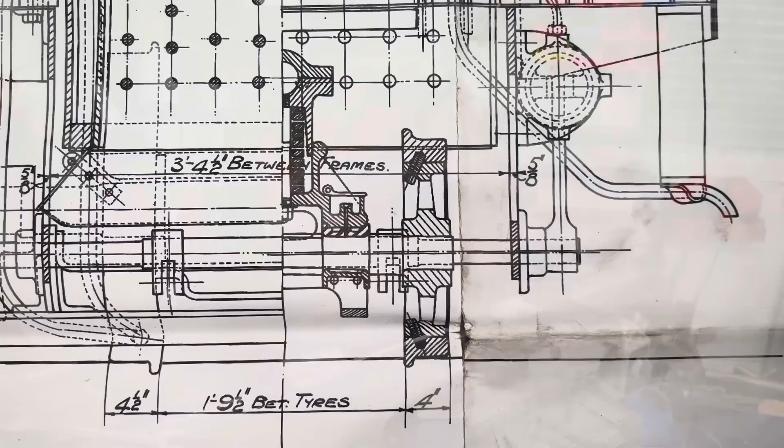So, looking at the end view of the loco, we are obviously back to the bogie again. Looking here, this is the main casting, which, if you've seen the other videos, you'll remember, quite a complicated, large, chunky casting. Down at the bottom, there's two little dowel pins that go through those holes, that go through holes in the casting, straight into the bottom keep for the axle box shell. You can see the two holes there just above the new foot that we welded on in a previous episode.

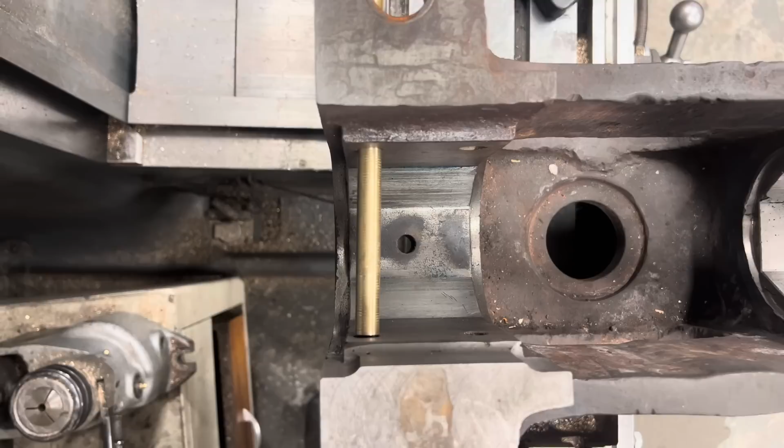If you look at this brass bar here, all you're looking at there is a brass bar pushed through the original hole, and you can see that it's not square, it tails off wildly to the left there. So we had to make a decision whether we lived with that or whether we tried to square them up by boring the holes out a little larger and putting an oversized pin in, which ultimately I decided we couldn't live with the wonky angle, so that's exactly what we did.

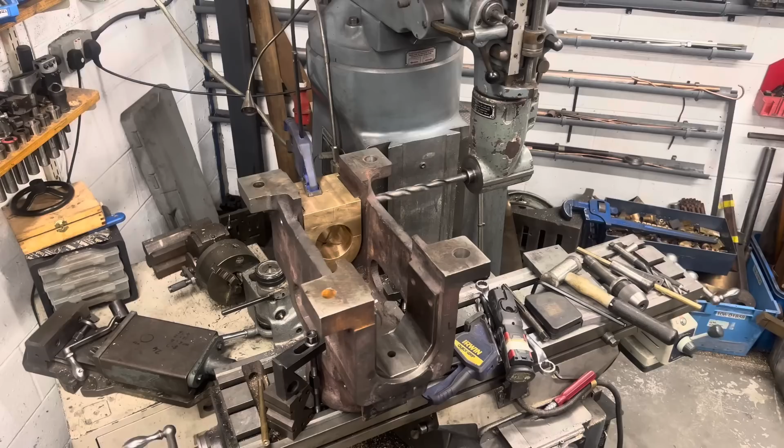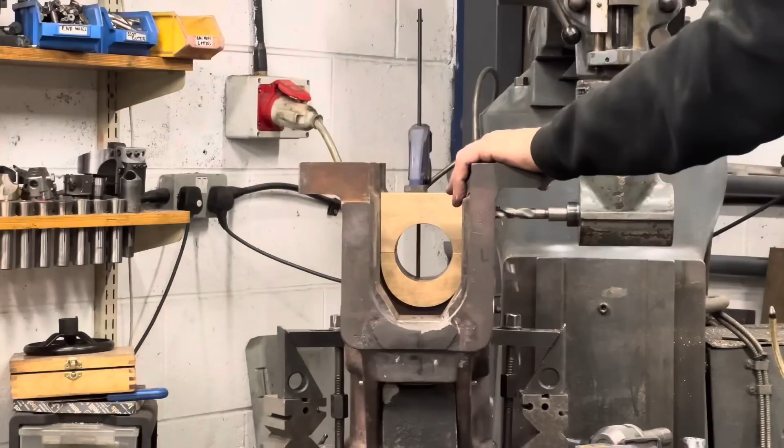This is Neil putting the long oversized drill through for the new pins. We've encountered this a few times with the rebuild, where holes that were obviously the original holes drilled in the Fowler works weren't entirely square or true, but I think the drawings were more like guidelines than rules at the time. Essentially, when you're trying to do it as a business, as Fowlers were, speed was important, so I think it needed 2 pins, and it just got 2 pins. But for us, we're trying to do a slightly better job, and that's why we've gone to this trouble to open it out to put fresh ones in.

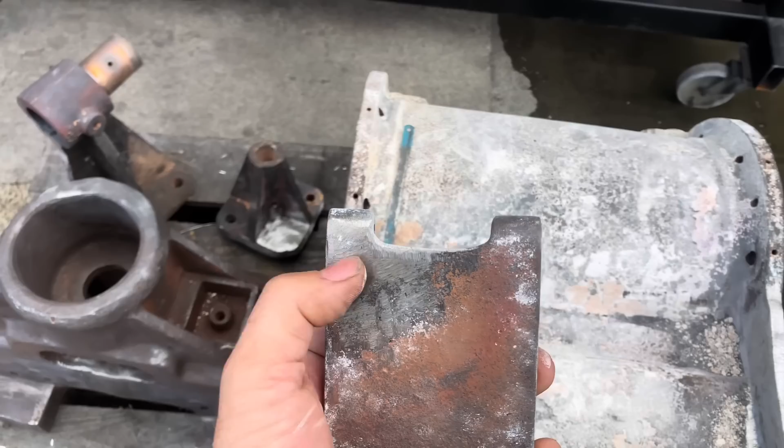This is the oil pot lid from the top of the oil well that feeds oil through the wick feed lubricator into the top shell for the bearing. The lid itself was fractured, the whole left-hand lug there was missing, so we cast iron welded on a lump and refiled it to the original shape. Here Neil is reaming out the holes for the pin. A new pin will be put through there, straight through the mended cover, which you can see here has now been painted, and then the whole thing reassembled, ready for oil.

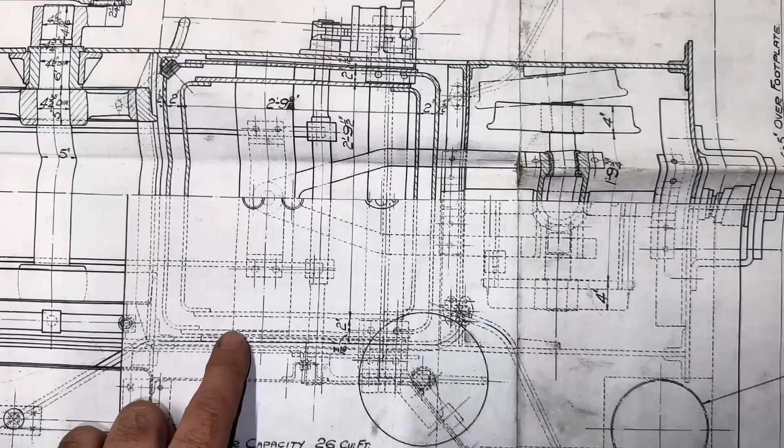I think that's enough to get in. Yeah. Another slightly different bit. This is where the large casting fastens onto the pony truck A-frame. There's a pivot pin at the end, which is what you see here, and there's a bracket that bolts onto the bottom of the frame stretcher to hold that pivot pin. The bracket's rectangular, there it is, and it's onto the frame stretcher, and obviously the pivot pin goes straight through the centre.

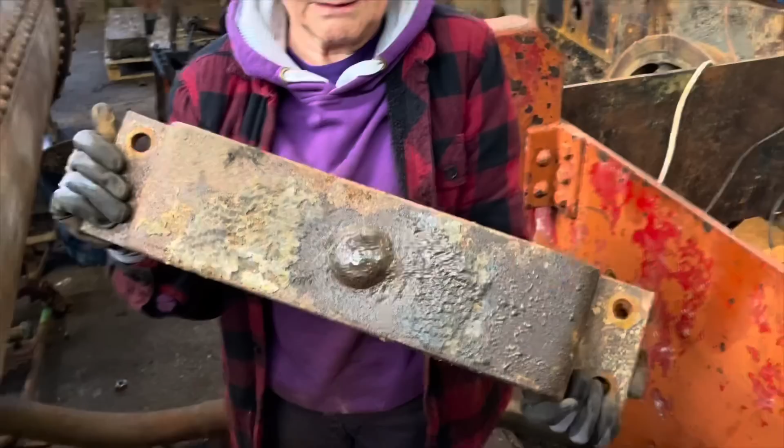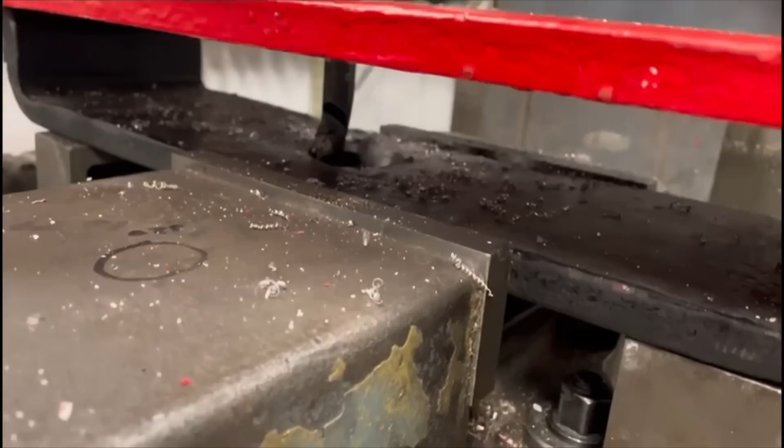This is a jump back in time to when we chopped off the rusted bolts to drop that bracket off the bottom of the frame stretcher. This is the bracket with the pin in it. The pin was extremely well worn, so we chopped the pin out, bored the holes, then rigged the bracket and the frame stretcher together to line them up in the correct position, and then we're boring the 2 holes together here so that they're concentric.

You can obviously see that the frame stretcher and the bracket were previously fully bead blasted and restored. They don't look anything like as messy and rusted as they did when we took them off the locomotive.

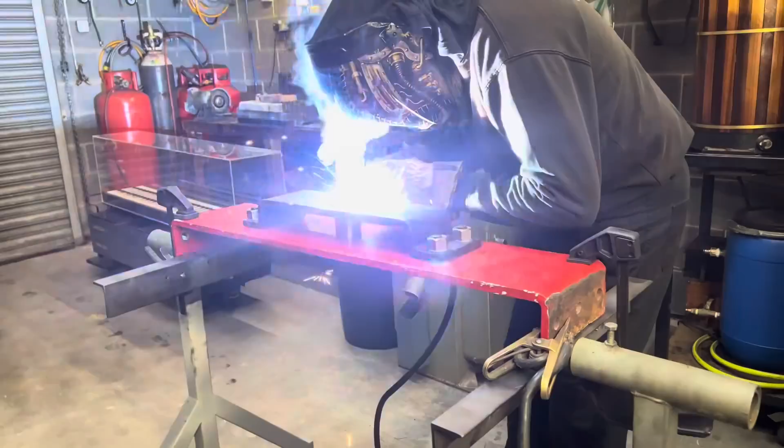You can see the bores are now concentric, so a brand new pivot pin was made, and this is Mark welding the pivot pin into the bracket itself.

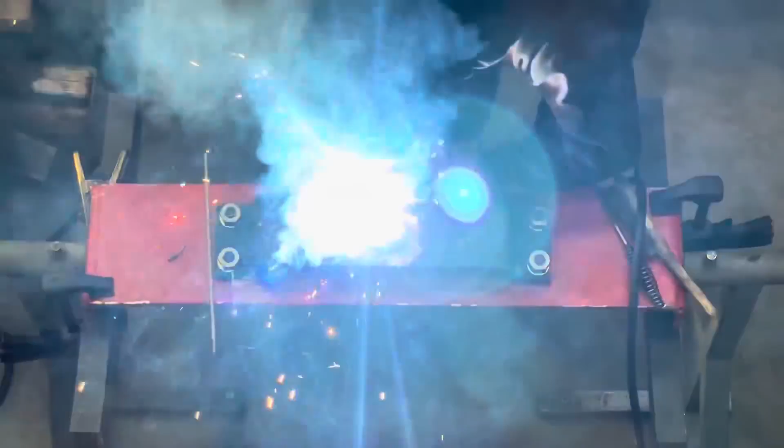The bracket is removable from the frame stretcher, and it removes with the pin, as you initially saw with Jenny holding it earlier when it first came off the loco. It's fully welded in, and that's effectively how you fasten the pony truck onto the bottom of the locomotive, allowing it to pivot left and right to go around corners.

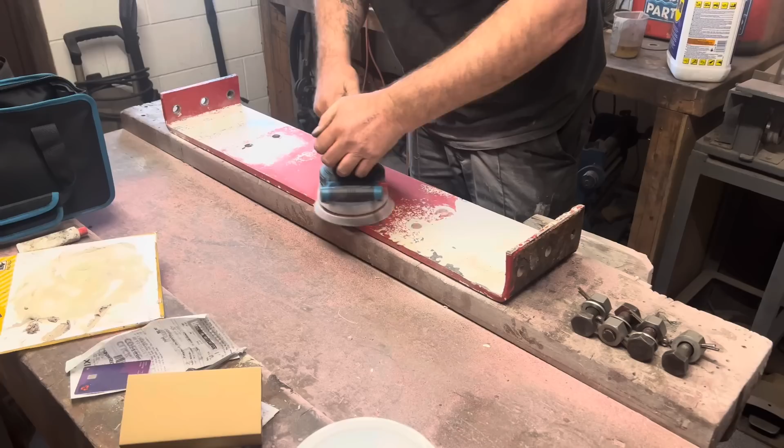And then of course the finished stretcher and finished bracket were all filled and sanded and primed and painted, and that's what you see here.

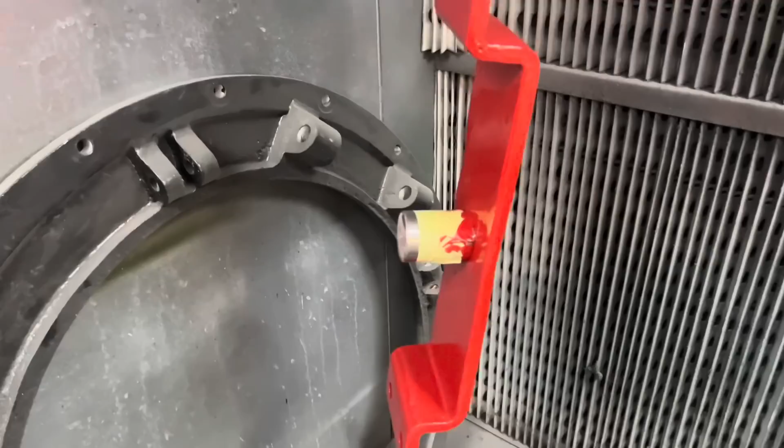The central casting is finished and painted, the frame stretcher in the background, and the bracket for the pivot pin over there. You can also see the smokebox front ring in the background, but they're the parts ready to go back on. Back briefly to the last part of the pony truck assembly.

The bronze shells, you see there's a gap there to the right hand side between the shell itself and the fatter part of the axle, as you see there. That's to allow lateral movement sideways so that things don't get tight, just enough to allow it to wiggle around a little bit and remain free.

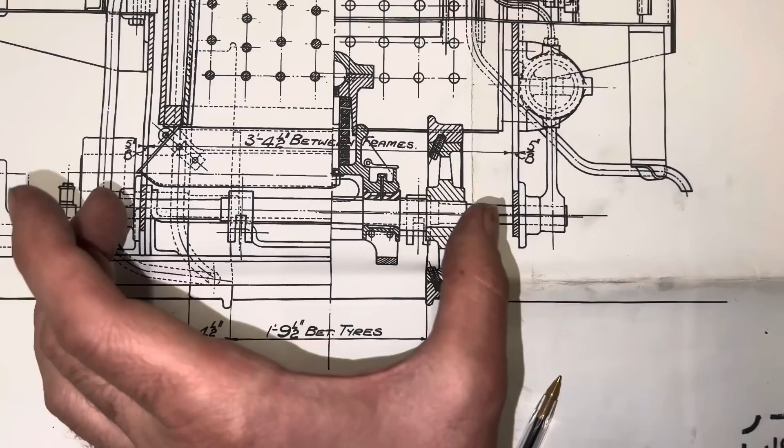But unfortunately, there was a little bit too much movement there. We're going to make a collar, which is what this is being chopped from a large diameter steel bar, to restrict that lateral movement. It was actually a mistake.

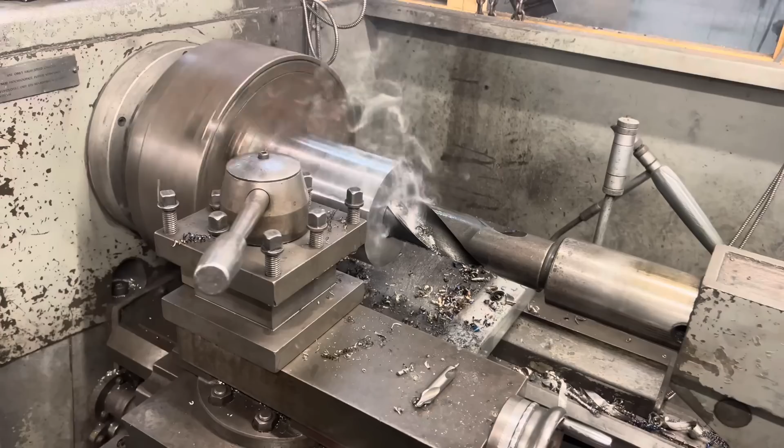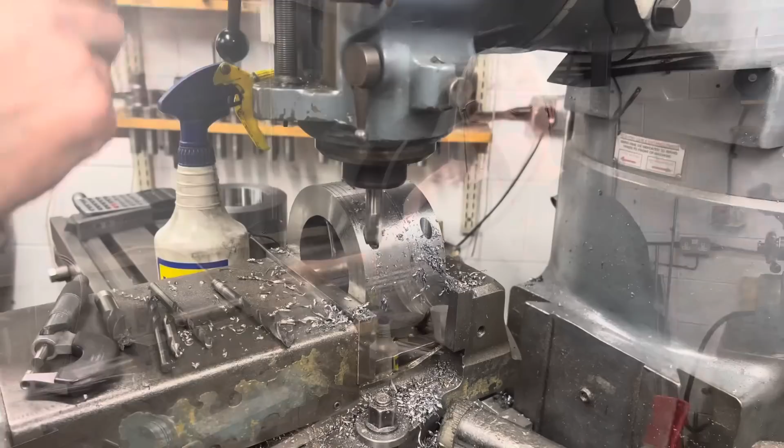We initially cast the shells to the pattern that we made to the original drawings without actually thinking about the wear levels on the axle, and they turned out to be quite significant. So our shell left that gap.

We looked at remaking the pattern, making new shells that were half an inch fatter, but ultimately decided that a better working solution was these collars.

The surface area on the side face of the collar is significantly larger and will rub against the shells, and so it represents a better bearing surface to resist that lateral movement.

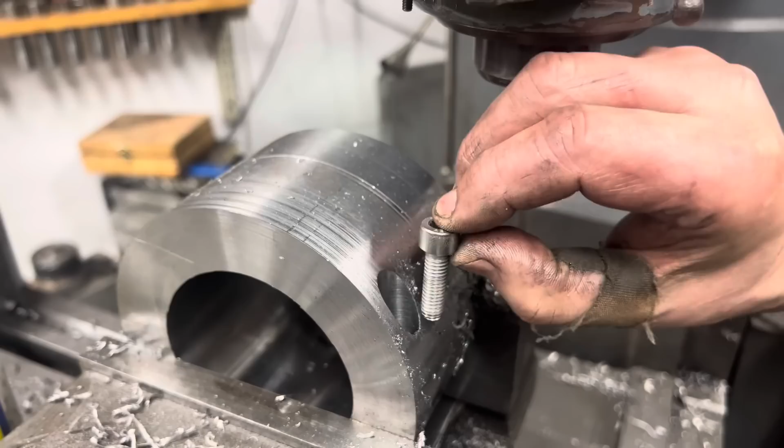If we just left the axle slightly fatter as the bearing surface to rub against the shells, it only pokes up onto the bottom surface of the shells by about a quarter of an inch, and therefore would be significantly more prone to cut into the bearing shell.

The collar was then cut into two halves, which you'll see being fitted to the axle later. This is the assembly, the final assembly of the pony truck unit.

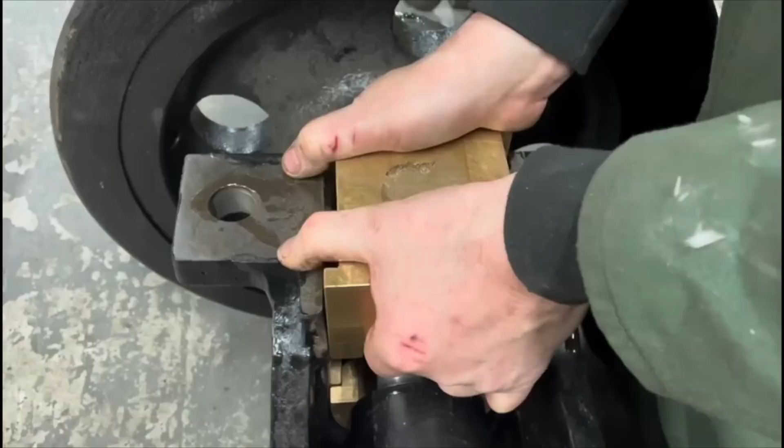The whole thing's upside down in this shot. You can see at the bottom there, the top shell is already in, the axle sitting on top of it. And in goes the bottom half of the bearing. That one doesn't actually touch the axle.

It touches down on the top shell, which keeps it 15 thou off the axle itself, just enough for the pad that it has in it to hold the oil and just wet the axle as it rotates in oil to make sure that it's constantly fed.

There's two pins in each side. This is Neil bashing the pins into the holes that you saw being bored on the milling machine earlier. Both pins have got a washer and a split pin in them so that they're easy to remove but retained safely. They just push all the way through, and then as I say, there'll be a pin and a washer through on the end as well.

This is the ones going in on the other side.

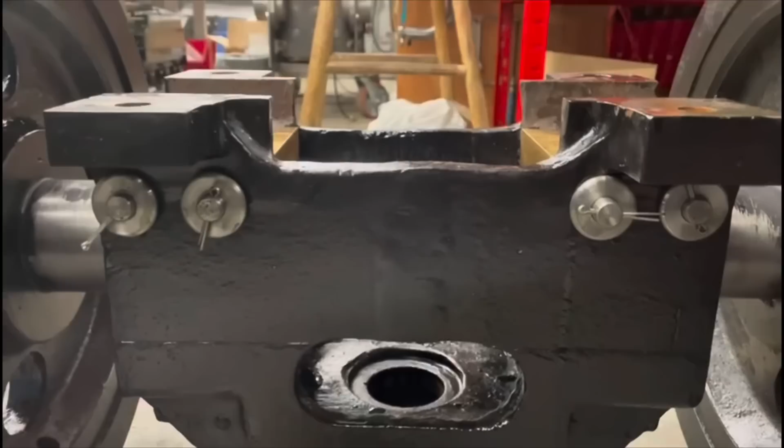If you look to the left of where Neil's bashing the pin in, you can see the gap between the pony truck casting and the wheel. Same here, you can see it both sides. Well, that's where these collars go that we machined earlier.

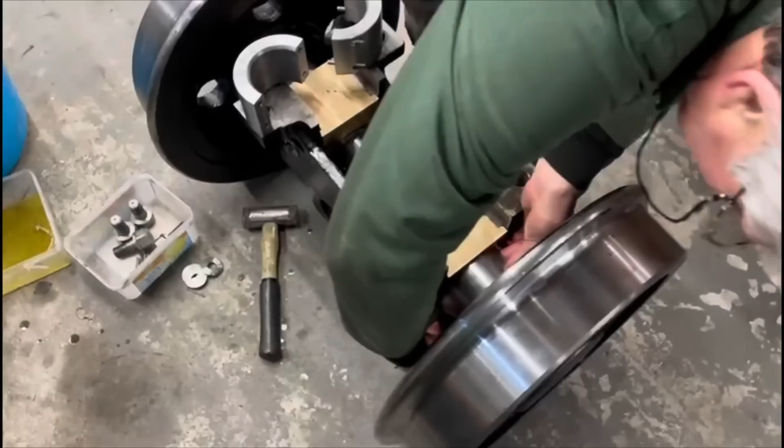Here's Neil fitting them, so there's the top of the collar and the bottom of the collar for one side, and the same for the other side. They straightforwardly clamp solidly to the axle itself. They rotate with the axle and the wheel, but the inner face rubs on the bronze bushes, a large flat face to spread the load and rub on that bronze face.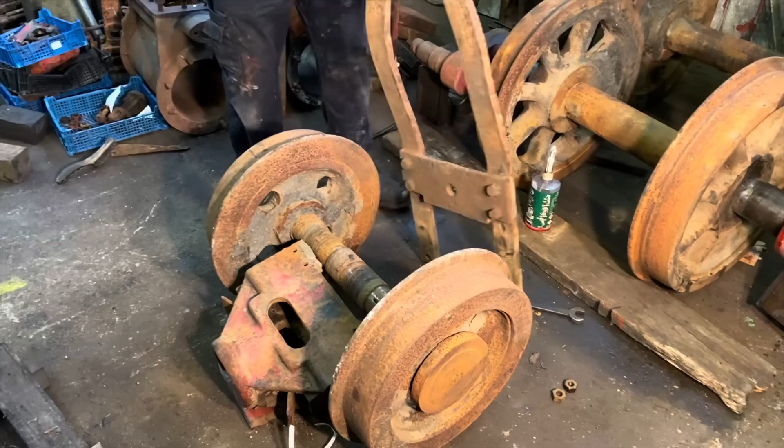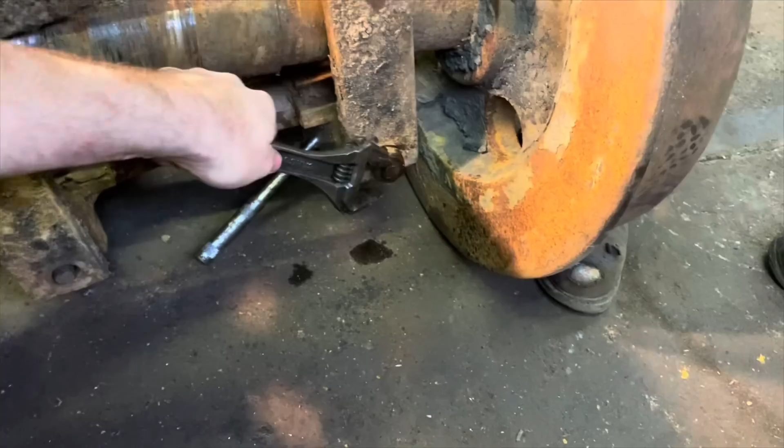So this is just a quick look back in time. This disassembly of the original pony truck is covered in an earlier video, but I thought it would be good before we show the finished article to show you what it looked like when it first came off the engine. As you can see, it's all pretty rusty. It had sat out in a field essentially for 60 years after it had finished being used at the sugar mill. The wheels were obviously returned, again the subject of an earlier video, and the whole frame and pony truck was stripped right down. All the parts were bead blasted, everything's been refurbished, painted, and then all put back together.

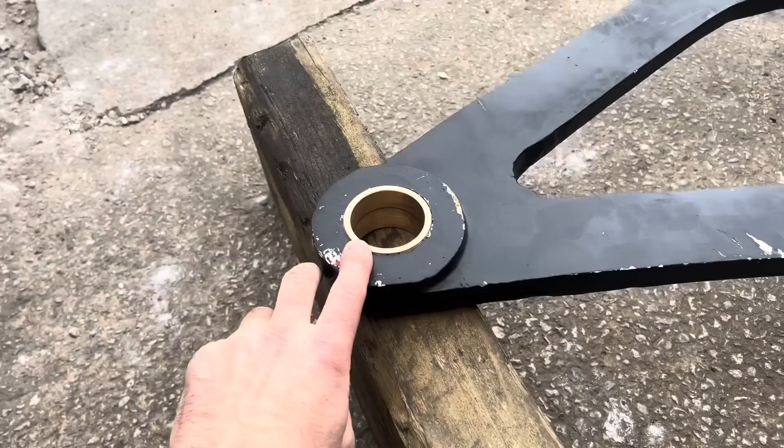This is the finished article. That's the pivot point with a new bronze bush in it on the A-frame that fastens onto the bottom of the main pony truck casting. The whole thing will get a last touch-up of paint before it goes back on the engine, so the odd little scuff here and there is not a problem.

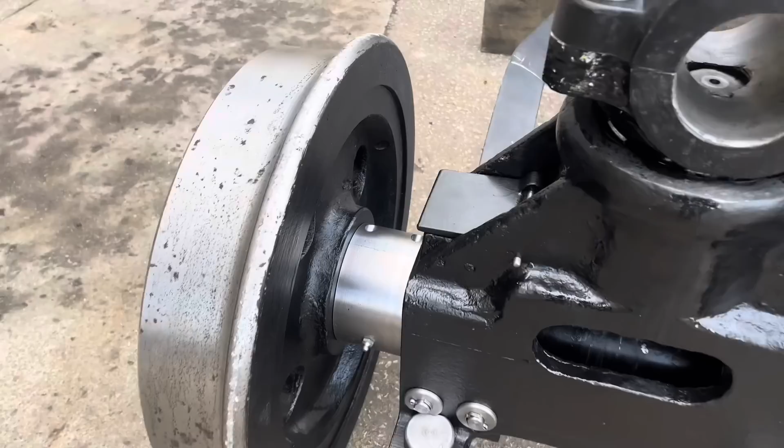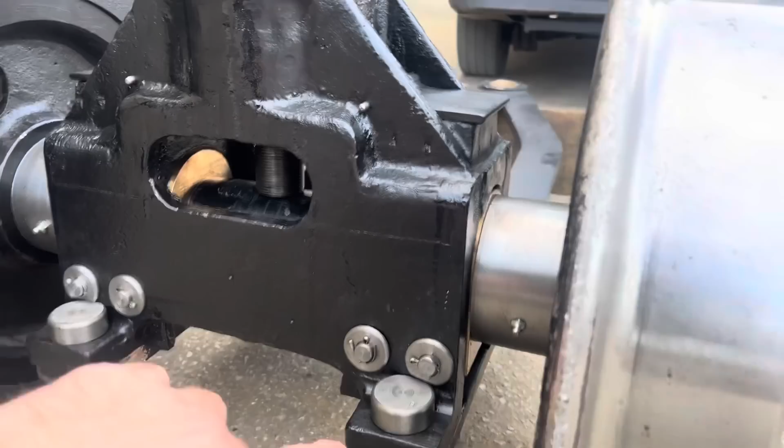Here you can see the collar permanently fitted in the gap there, bolted up, clamped tight to the axle. You can see the new feet there with the pins and the 2 little pins that hold the bronze bushes in. You can see here the bottom bronze oil cap and the top bronze shell over the top, and you can see them through the centre there as well, one on the left, one on the right. That's where the load's transmitted through into the engine, or from the engine to the axle.

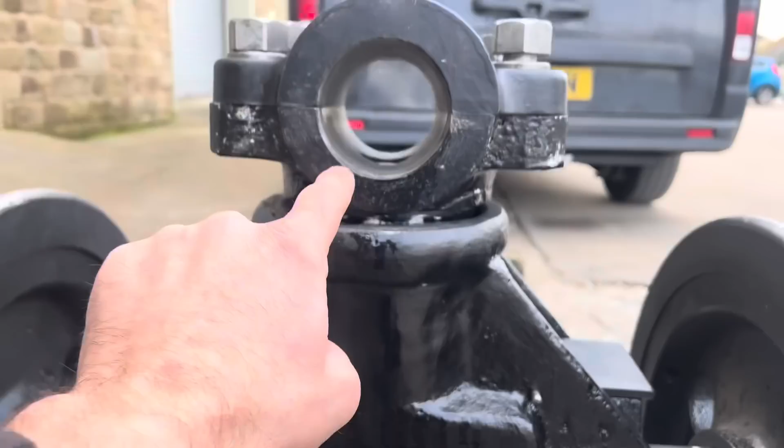The main frame there sitting on the axle at the moment, it won't be, that lifts up because there's a spring goes into the main body of the casting there that we'll cover in a later video. And the main pivot point at the top is there ready to take the lever arm that again we discussed in a previous video. So that's the pony truck ready to go back on the engine.

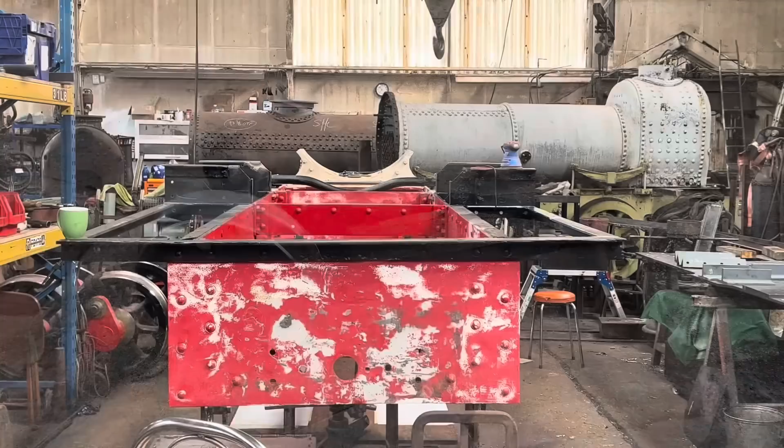Now this next bit's going to shock some of you. If you look at the left hand side, this is the back of the loco frame, it dips down. It drops down by about 1.5 inches to the back left hand side. You can just see it there.

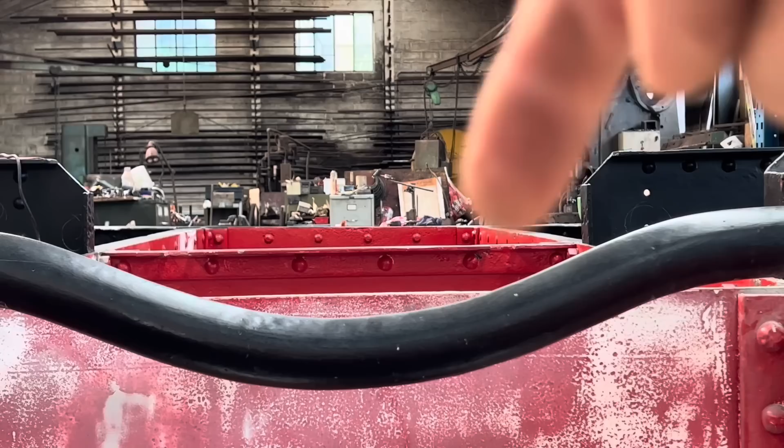Now this is because the frames are twisted. They're actually twisted on the back left axle box. Now at some point the horn guides that hold the axle box there have been refitted and straightened. You can see clearly here, if you look at the frame stretcher as opposed to the frame, you can see it drops down quite clearly. Now we didn't want to mess with the actual horn guide space near the axle box because that's already been fixed at the sugar mill, and we checked it and that's square.

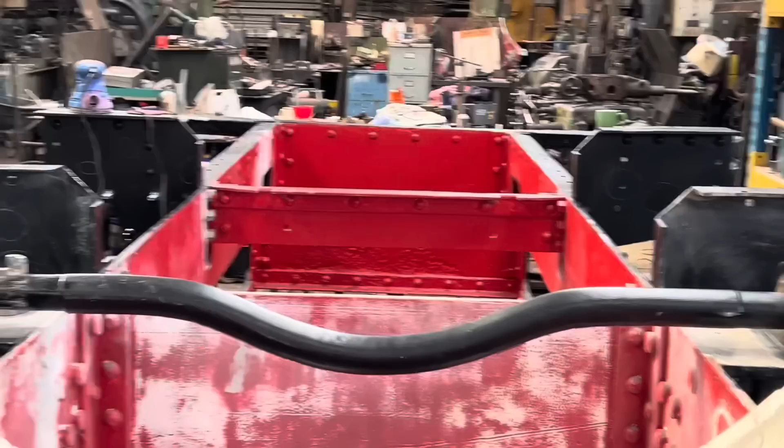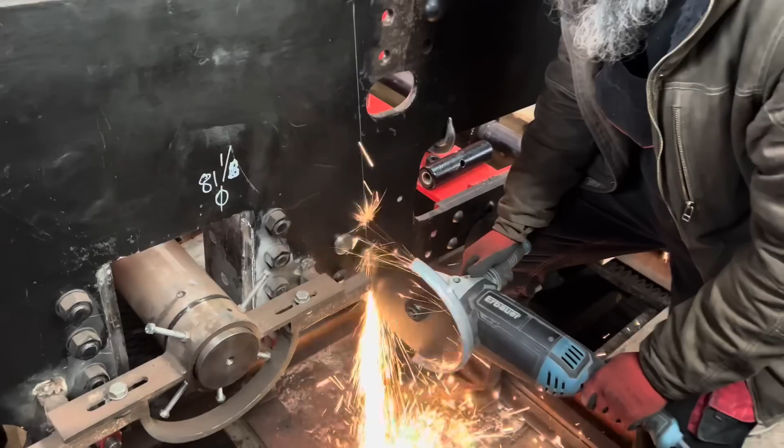So we decided the best thing to do was to chop the frames behind that axle box. Quite a big decision because nobody wants to chop through a full set of original frames, but we decided we couldn't live with the dip because it would have thrown the whole foot plate and cab out, and we decided that we could do a proper weld repair up there that would be just as strong as the main frames.

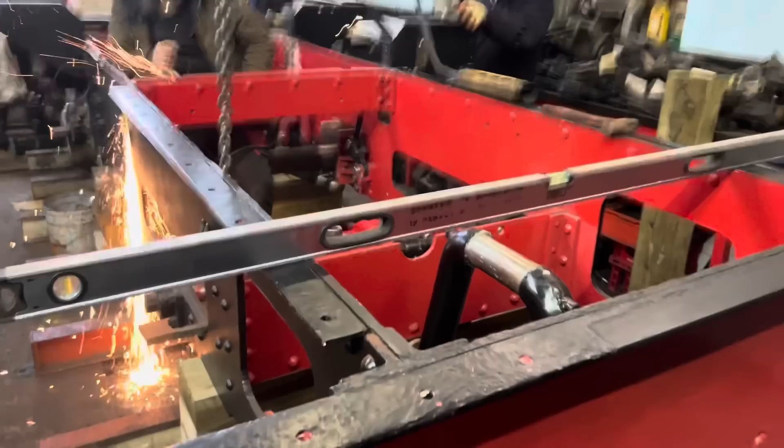So that's what we're doing here. We're slicing through almost to the top, leaving a little portion of 2 or 3 inches at the top of the frame joined so that the actual length of the frame doesn't change. But if we split the whole frame right the way down there behind the axle box hole, that will allow us to lift the rear section of the frame up, which you can see here, the spirit level showing us how far down it's dropped at the edge.

How far down it's dropped at the edge. And if I lift the spirit level up to pull the bubble into the centre, you can see at the edge how far down we are there.

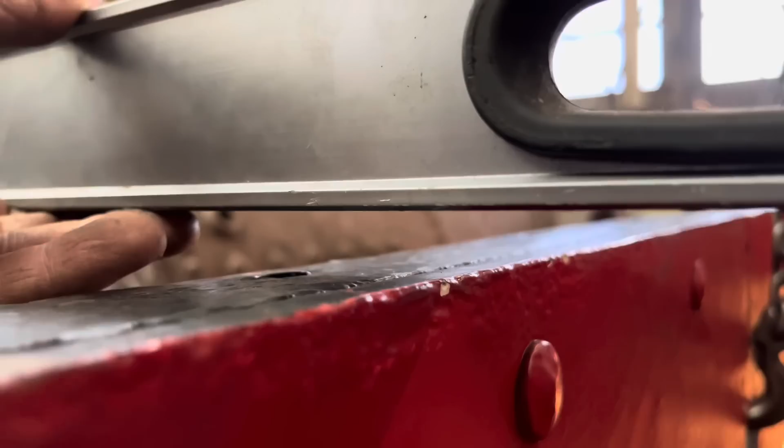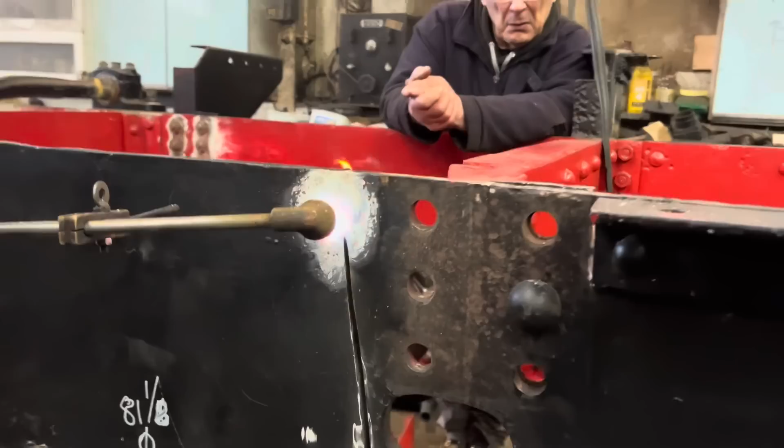You can see in the picture the chain attached inside one of the holes on the frame, on the overhead crane, and we're lifting on that. The idea is that if we heat up the top portion that we haven't chopped through with the burner, it becomes slightly malleable, and we can lift with the crane and allow it to split at the bottom of that split, moving the two edges apart so it lifts the back end of the engine up back square. When we've done that, we can weld the whole thing back up again.

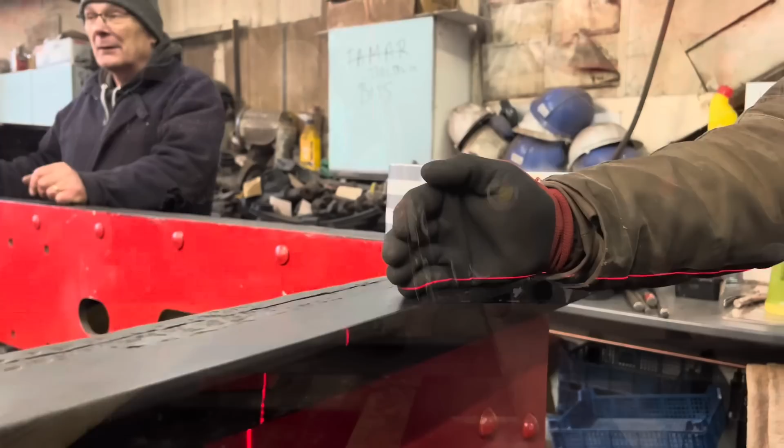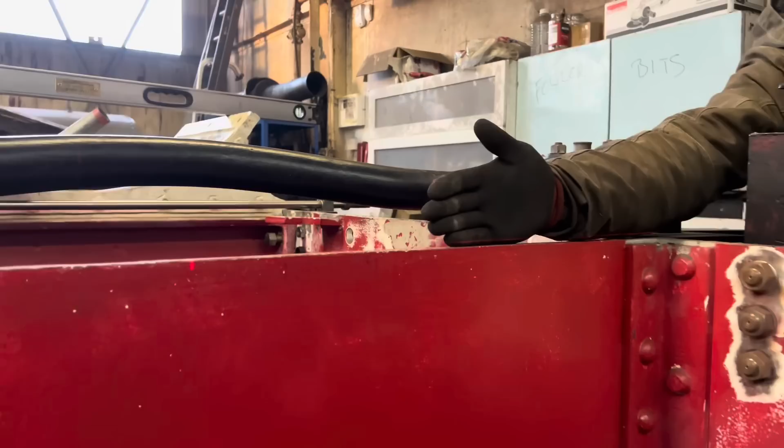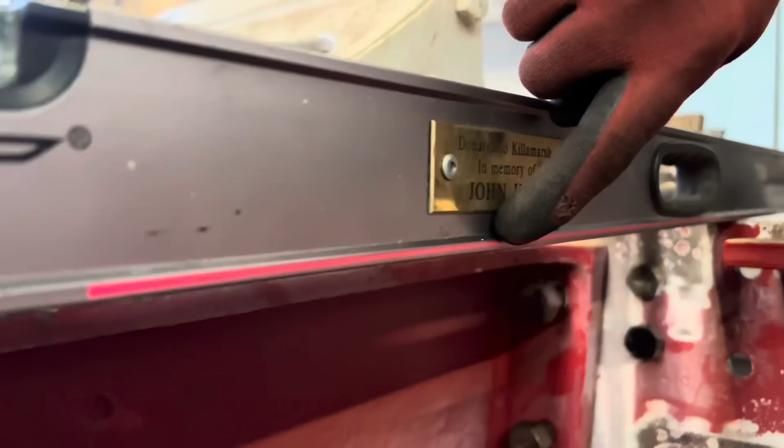So this is the laser level across the back. We've got it back level just above the top of the frame. Same thing there with Ian's hand, same thing with Mark's hand, and the same thing right up at the very front. So we knew it was level all the way across, all the frame stretches, the top of the buffer beam here just behind the smokebox saddle. Again, it's right in the same position and horizontal all the way across. So we knew that everything was square, everything was in the right position.

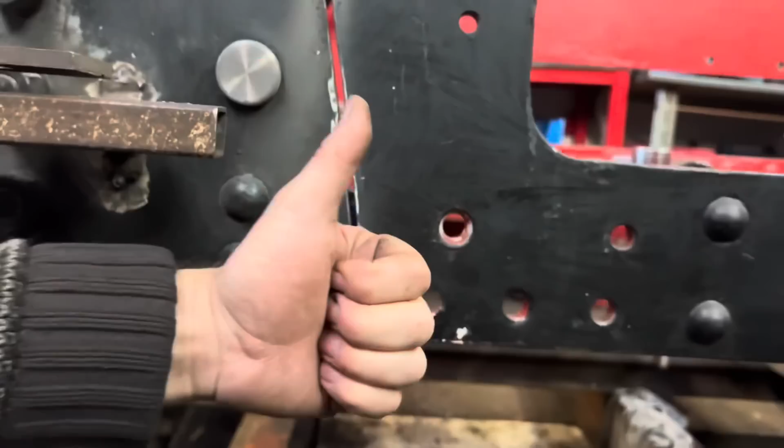The crane is holding everything, or was holding everything up, now it's blocked in position. So now it's time to clamp it all up and weld that hole up, which is now obviously slightly wider at the bottom than it is at the top.

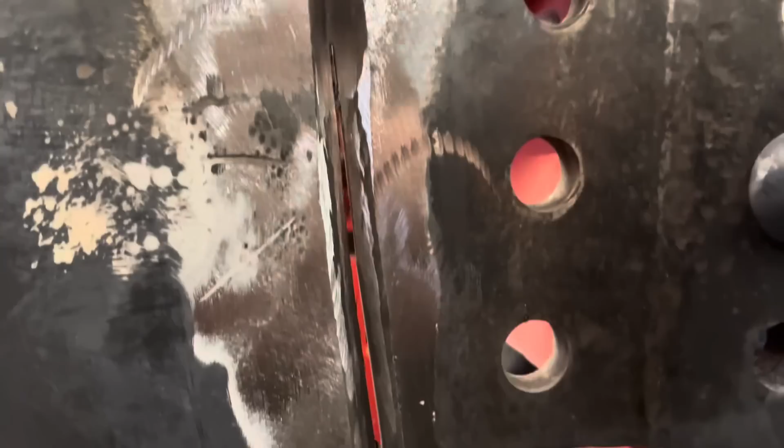So this is weld prep. The actual cut slot is angled to 45 degrees on either side, on both the inside and outside, front and rear. There's no two ways about it, it's an extreme step, but we felt it was worth taking at this point because there was not going to be another opportunity to do that. And everything we do from this point onwards needs to be on a straight flat surface for the footplate and the cab. So the first thing to do is lay down a root weld to stitch the two together.

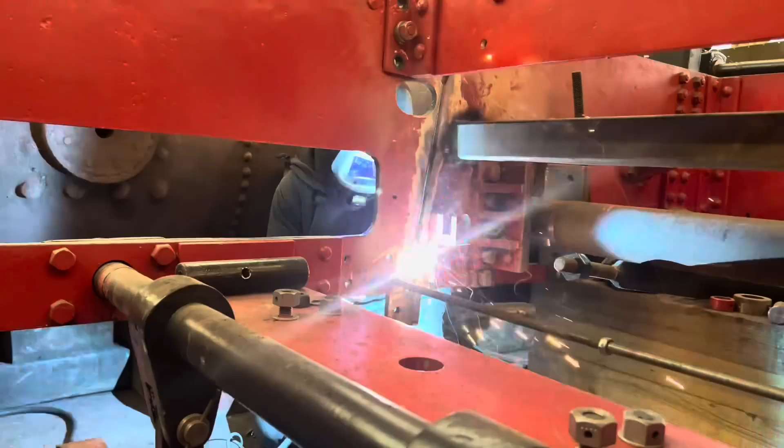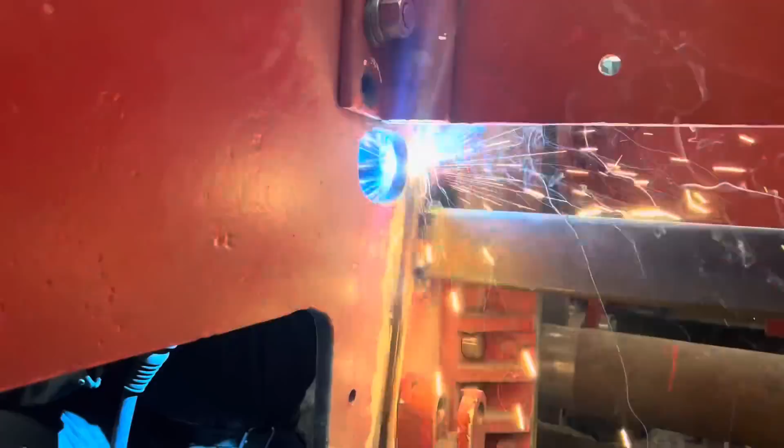You can see here there's a square tube welded and a threaded bar across the bottom of the frame and halfway up the frame. That's to keep the frames exactly where we wanted them. The threaded bar has nuts on it that allowed us to position the frame exactly where we needed it, and the square tube was welded in place to hold it there too. It allowed us to make sure the surfaces were truly flush with each other as we welded it, and it allowed us to clamp it so it didn't distort as we did that.

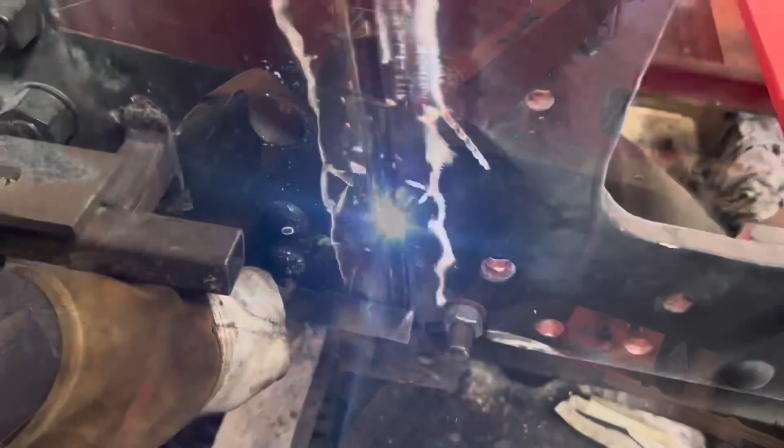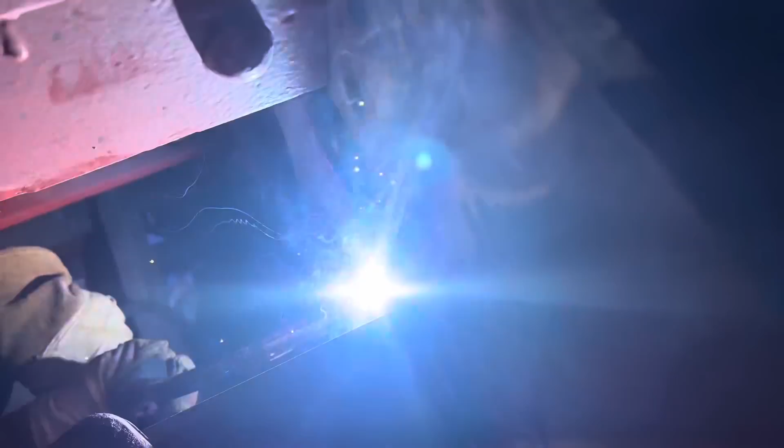You can see here, checking halfway through, the root weld is in, but we're checking with the flat edge that the two surfaces are still bang on level. This is the weld going in to lay down some of the covering welds to fill in over the top of the initial root weld. It's all coded welding, so it's going to be extremely strong, it's boiler quality. The hope is that the finished joint will be just as strong and stable as the plate was initially, but now we've got a truly square footplate to begin building upon.

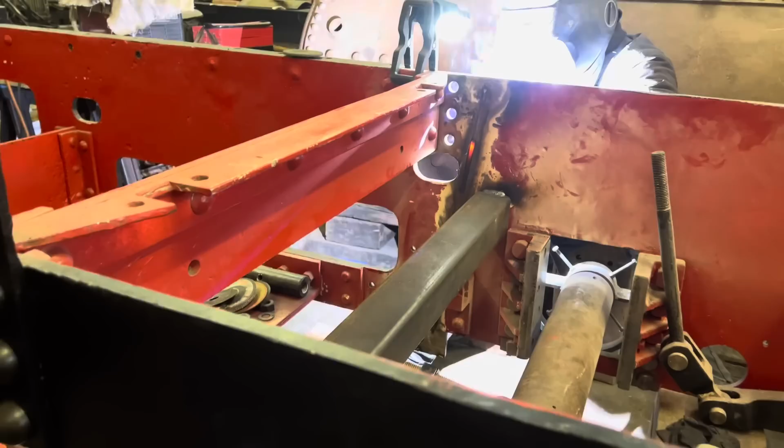The square steel tube that we put in to hold the frames where we wanted them just gets chopped out and the surface sanded back, having served its purpose. The last couple of capping welds go in. This is just before the last coat of weld goes in. The whole lot will be ground flat and finished before we paint it, and now we've got a square set of finished frames.